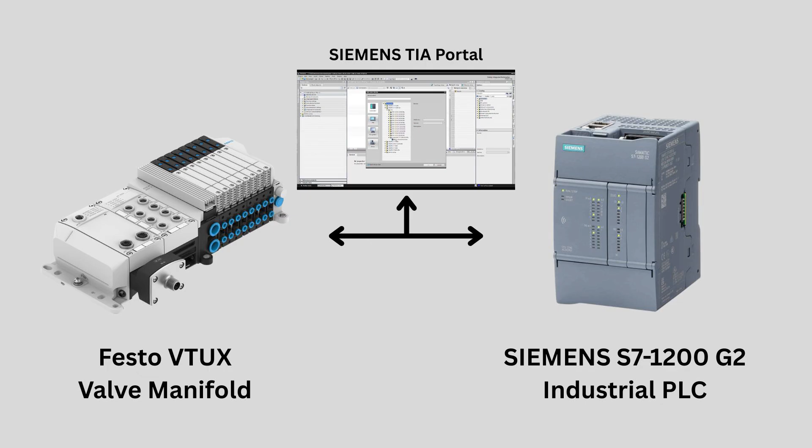In today's video, I'm going to go into TIA Portal and show you step by step how to configure an S7-1200 G2 PLC to communicate with the Festo VTUX valve manifold. Before I get into the demo, I wanted to share with you a few of my favorite features of the S7-1200 G2 PLC and this Festo VTUX valve terminal.

So here we have a new S7-1200 G2 CPU. This particular model is an S7-1214C DC-DC-DC. As you can see, the form factor has changed slightly. Its footprint is narrower, it's a little bit taller, smaller than the size of my hand. One of the great new features is how we wire the new G2.

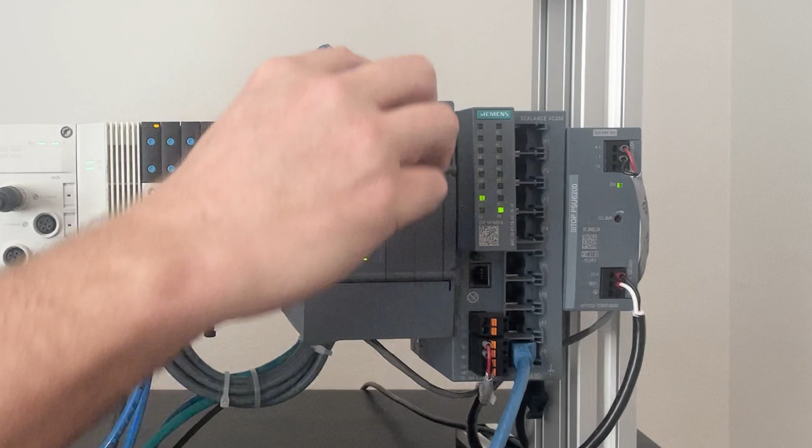All the terminals are push-in connectors, just push in your wires. If you need to pop out the terminal blocks, you could do it with a cam. There's these little cams on each side. You just push them down with your finger and the whole terminal block pops out. These can be expanded up to 10 signal modules, and this particular model has 2 slots for signal boards in the front. The G1 only had 1 slot.

Talking about the signal boards, Siemens is going to release a fail-safe version of the signal boards. So if you need a few I/O points, safety I/O points, you can do that with the signal board now. No need to add a signal module to the right of the CPU.

Siemens has increased the memory capacities of these CPUs, and also the cycle time on these are very, very fast. Because of the faster cycle times and increased processors in these CPUs, they now have more advanced motion capabilities. So if you have a machine that has a few servo motors, you don't need to go up to a 1500 anymore. You could do it with the S7-1200.

So here we have a Festo VTUX valve terminal. As you can see, it's very compact. It's a very powerful valve terminal, very lightweight, made out of a polymer material. These are highly configurable. Configuring these on the Festo website is very simple and straightforward. You have lots of options when it comes to the I/O modules.

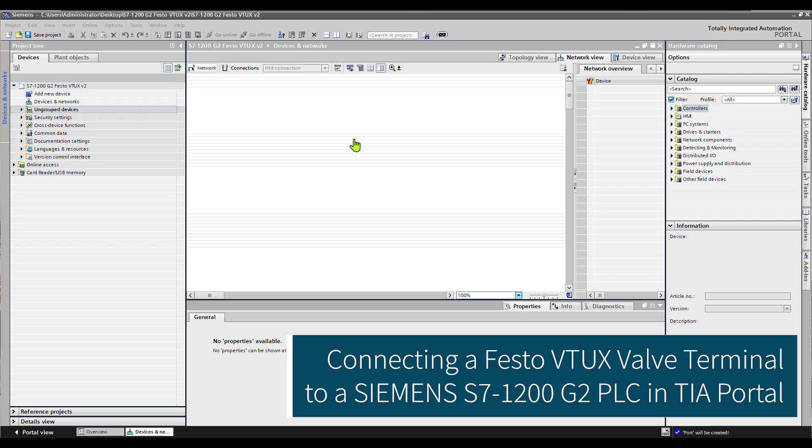All right, let's get started with our Siemens Works with Festo demo. I've created a new TIA Portal project, and as you can see, there's nothing in it. So let's add in an S7-1200 G2. First thing we have to do is go to the project tree and add a new device. I'm going to go to controllers, SIMATIC S7-1200 G2, CPU, unspecified S7-1200 G2. In order to configure S7-1200 G2 CPUs, you need to be using TIA Portal V20 or higher.

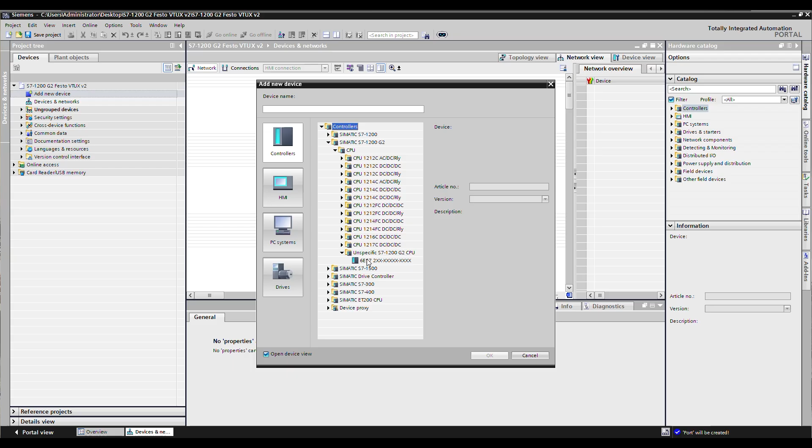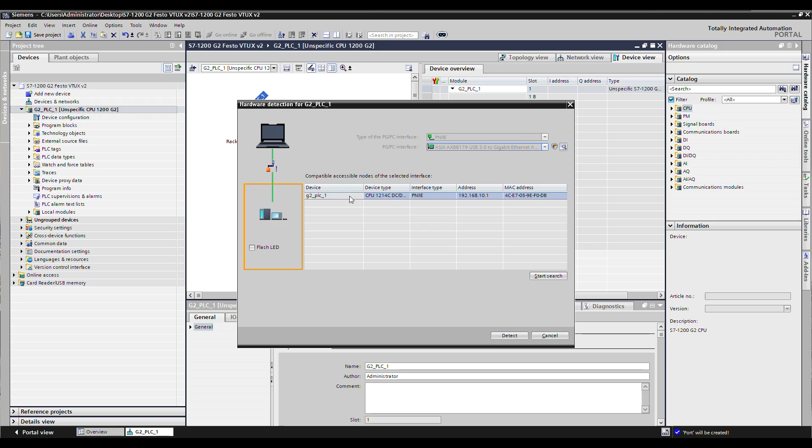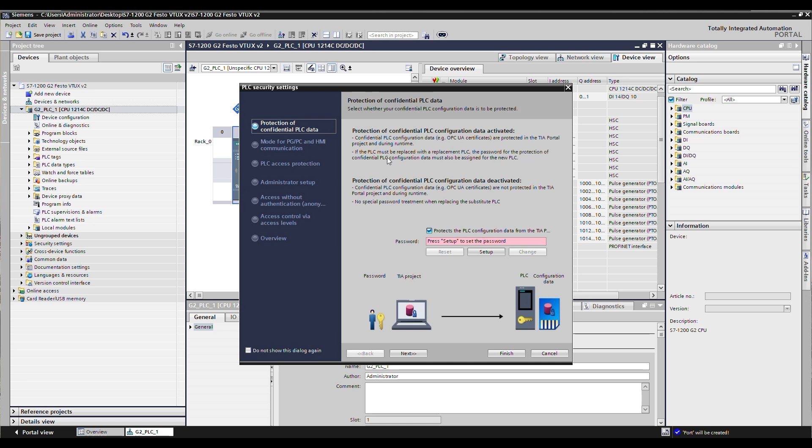I'm going to click OK. Now that the unspecified S7-1200 G2 is added to my project, I'm going to click on Detect. I'm going to select my network adapter, and I'm going to do a search. Now that it finds the S7-1200 G2 that I've networked to my PC, I'm going to click on Detect. And it's going to pop up this security wizard. I don't need any security for this demo, so I'm going to disable everything.

Now I have the S7-1200 G2 added to my project. The next thing I need to add is our Festo VTUX manifold. It's not going to be included in the hardware catalog, so I need to go to the Festo website and download its GSD file. So here I have the Festo website open. At the top of the page, I'm going to search for VTUX. In the search results, I'm going to click on VTUX.

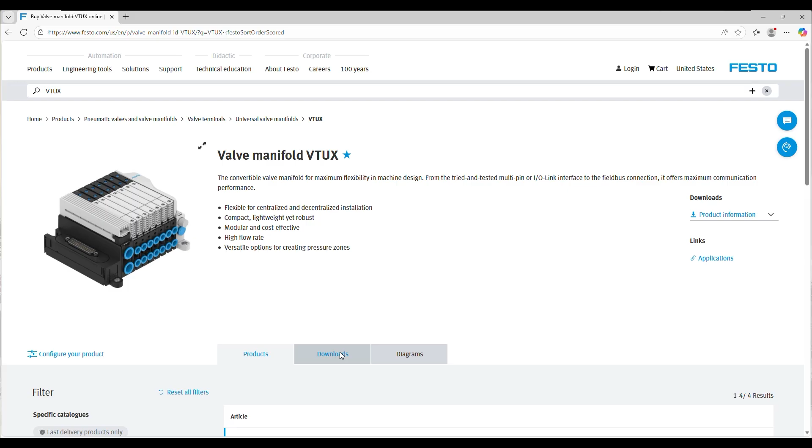Then I'm going to click on the Downloads tab, and then on Software. In the list of software, I'm going to scroll down until I find the GSD files, and here I have found two of them. The one I want is the GSD for the CPX-AP-A, and I'm going to click on the Download button. I'm going to go into my Downloads folder, and I need to extract the zip file.

After it's been extracted, I'm going to go back into TIA Portal, and I'm going to go up to the Options menu, and I'm going to select Manage General Station Description Files. I'm going to browse to my Downloads folder. I'm going to open up the GSD folder, and I'm going to select the highest version, and I'm going to click on the Select Folder button.

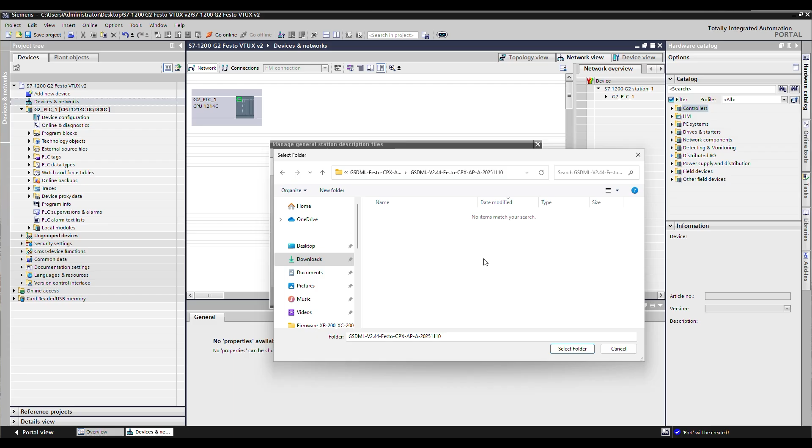You can see here I've already gone ahead and installed this GSD file, but what you'd want to do is click on this checkbox and click on Install. That will install the GSD file. After it's finished the installation of the GSD file, what I like to do is go to the Online menu and click on Hardware Detection and PROFINET Devices from Network.

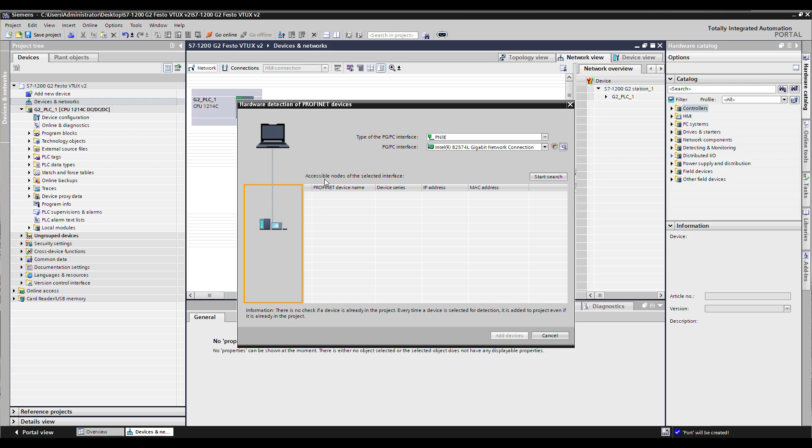Next, I'm going to click on my network adapter and do a search. Here's the Festo valve terminal that I want to connect to and insert in my project. I'm going to check this box. I'm going to click Add Device.

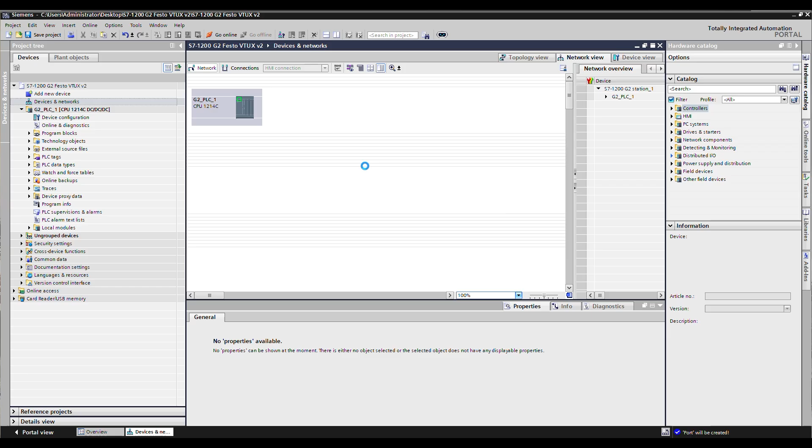Now that I have the Festo valve terminal in my project, I need to create the network connection between the valve terminal and my 1200 PLC. I'm going to click on the Not Assigned link, and I'm going to select the G2 PLC. Now what I need to do is assign a PROFINET device name to this VTUX valve manifold. I'm going to right click on it, and I'm going to select Assign Device Name.

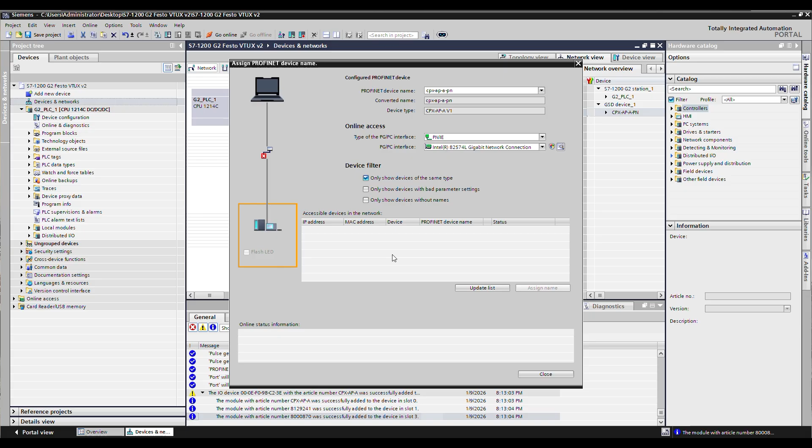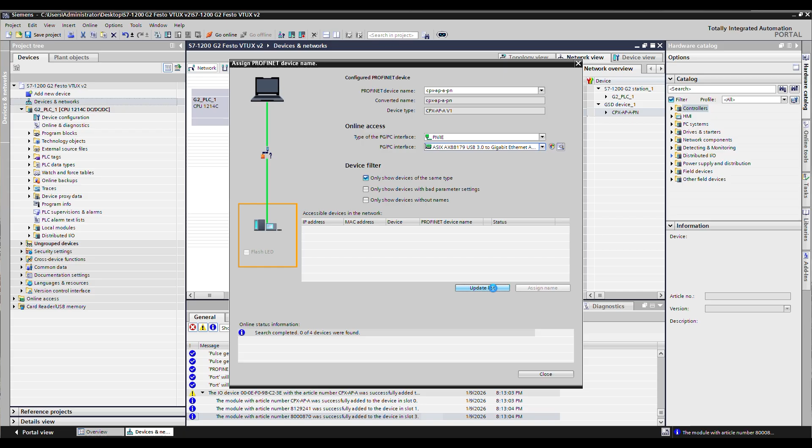I'm going to click on the Update List button. I actually didn't select the correct network adapter, so I need to select the correct network adapter, click the Update button. It finds the valve terminal, and you can see that it has no device name assigned, so I need to select it and click on Assign Name. You can see now that it has a PROFINET device name. I'm going to click on Close.

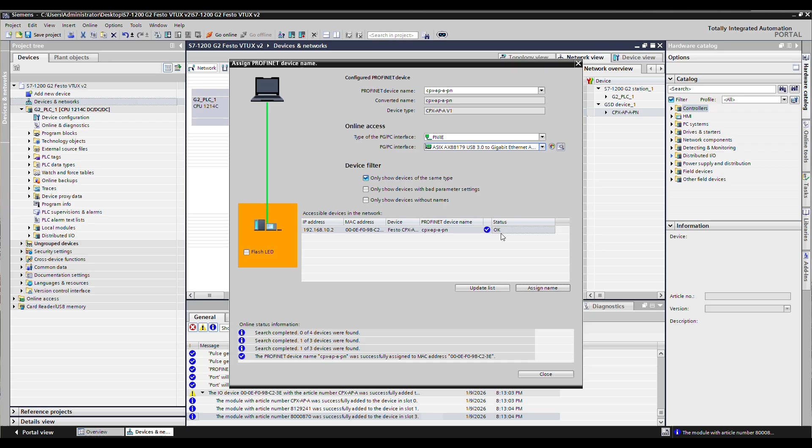Now that the PROFINET device name has been assigned, I'm going to go into the device view. What is important here is in the device view, you have to make sure you have the correct modules inserted into the correct slots. So you could do this in a couple ways. You can physically look at the way you have your valve terminal configured, but you can also go online with the web server of the valve terminal and it'll show you its topology.

So I open up a web browser. I'm going to type in the IP address of my valve terminal. And here I'm connected to the CPX AP web server of the VTUX valve terminal. I'm going to click on AP topology, and this gives me the modules that are in each slot. So in slot 1, I have the CPX-AP-A PROFINET module. In slot 2, I have the CPX-AP-A IO-Link master module. And then in the third module, I have the valve slices.

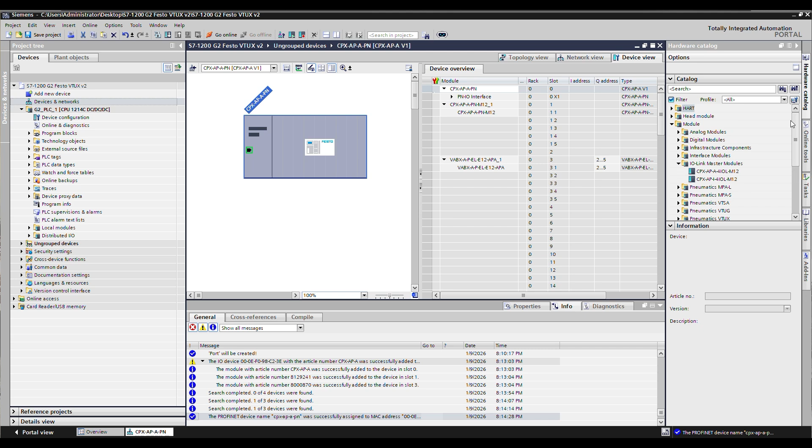So now if I go back into TIA Portal, I can see in slot 1, I have my CPX-AP-A PROFINET module. And in slot 3, I have the valve slices. The only thing I'm missing is my IO link module. So I'm going to go to the hardware catalog. I'm going to go to IO link master modules, and I'm going to select my CPX-AP-A IO-Link master module and put it into slot 2.

Now, since this is an IO link module, I need to configure the data that I'm going to have on each port. I don't have any IO link sensors connected to my IO link master, so I'm going to keep these ports deactivated. I'm going to go back into my hardware catalog. I'm going to go into submodules, IO link generic devices, and I'm going to select port deactivated. I'm going to add this to each one of my ports. And that is it for my configuration.

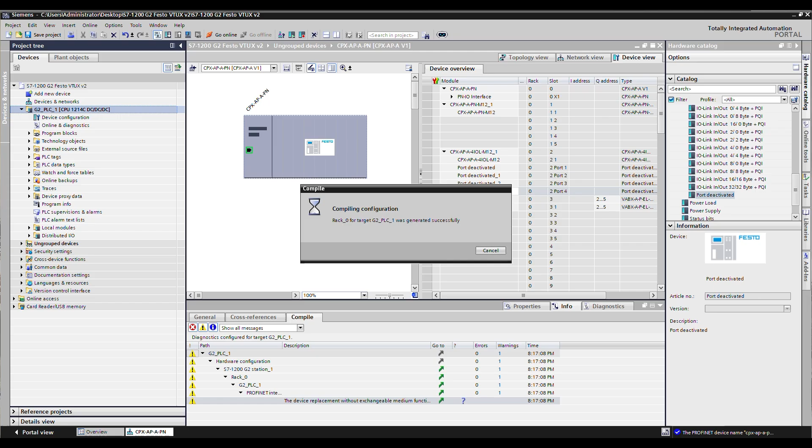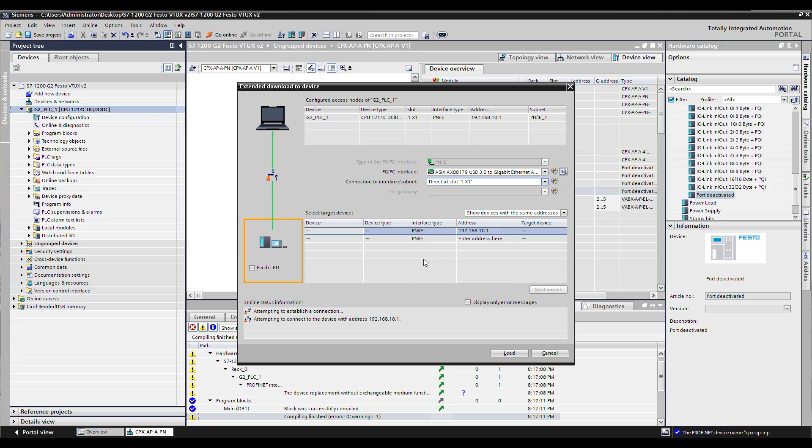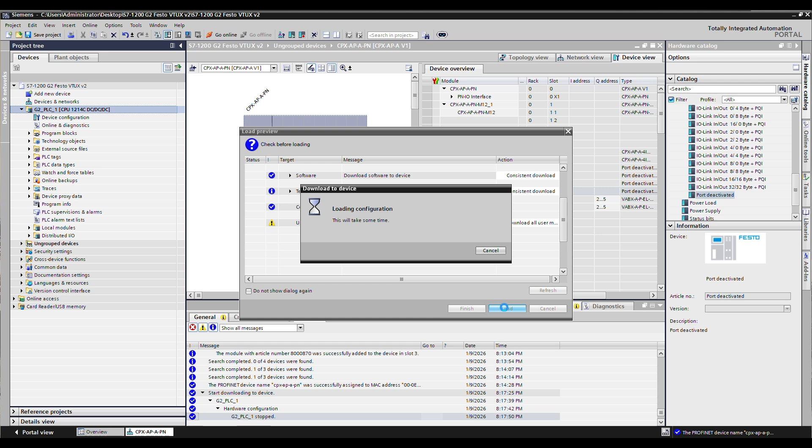The next thing I want to do is I want to compile everything. I'm going to go up to the toolbar and hit compile. It is finished compiling. I have no errors and one warning, and the warning I'm not worried about. The next thing I want to do is download to the PLC. So I'm going to click on the download button. Now it's searching for the PLC. It finds it over the network, and I'm going to click on load. I want to make sure I start the modules, and I'm going to click on finish.

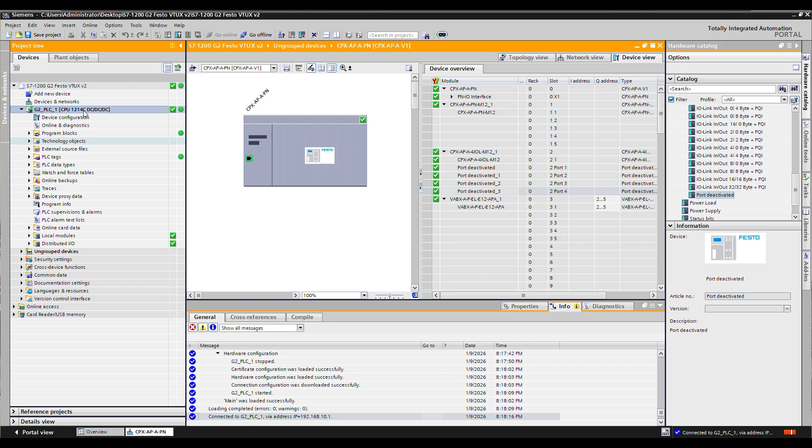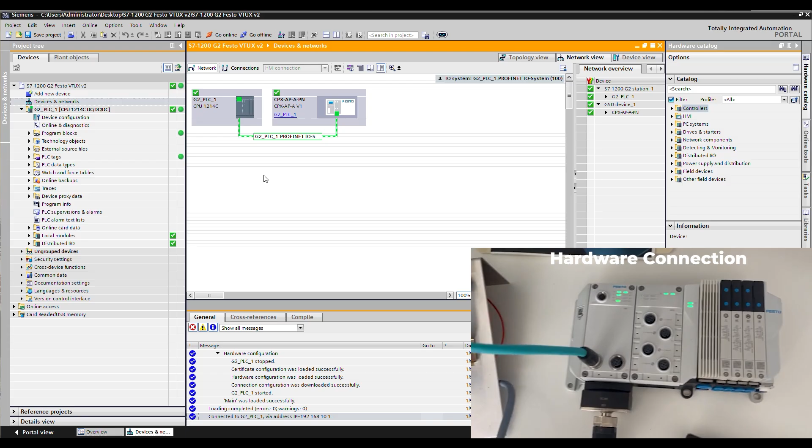Now that I've downloaded to the PLC, I want to go online with it. And you can see here I have a green checkbox and all green indicators. I go to my network view, and both devices have green checkboxes. That indicates that my configuration is good and doesn't have any errors. So now I want to test some valves on my valve terminal. If I go back into the device view, I can see the starting address for my valves is byte 2.

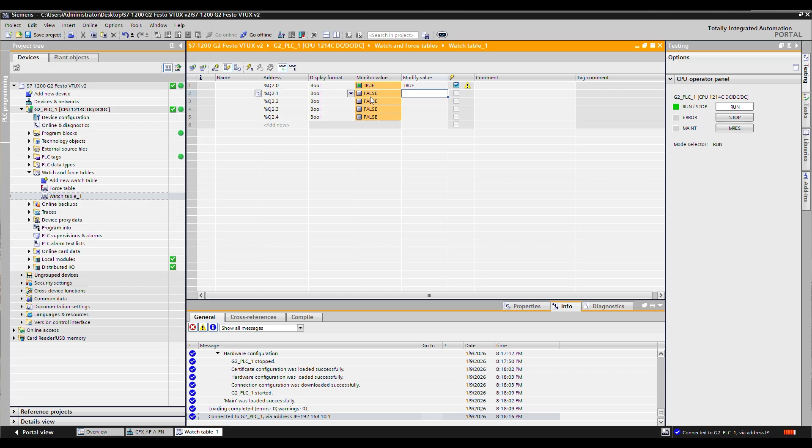So I'm going to go to a watch table. I'm going to add a new watch table. And I'm just going to add in some output tags starting at 2.0. I'm going to monitor, and you can see that all these are turned off. And if I look at my valve terminal, I can see that all the valves are turned off. I'm going to modify this one to true, and I'm going to modify it. I can see here that the monitored value is true. And if I look at my valve terminal, I can see that the first valve slice is turned on.

And I'm going to turn it off, and I'm going to modify it. Now it's turned off, and I've verified by looking at the valve terminal it's turning off. I've verified everything is working, and that is a quick and easy demonstration on how to configure a Festo valve manifold to communicate with the Siemens S7-1200 CPU.